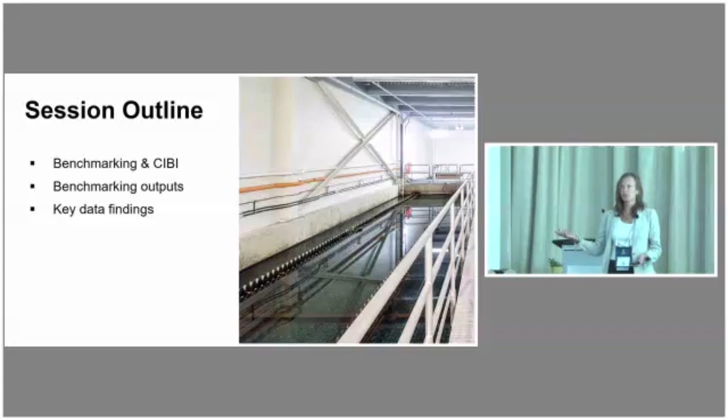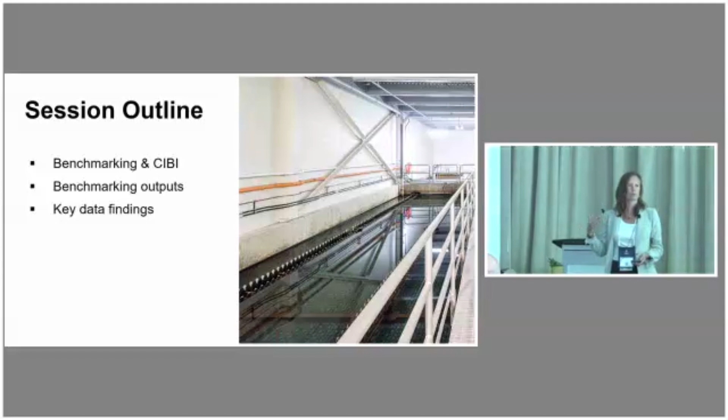I'm just going to do a brief introduction talking about benchmarking. What is benchmarking? What is the Canadian Infrastructure Benchmarking Initiative? But then I won't go too long. I'll get into the good stuff, the data, looking at trends. What have we found from benchmarking? What lessons can operators, water and wastewater operators, learn? Any questions along the way, please just ask.

So the idea behind benchmarking is, we're not back in high school, it's not about grading, it's not A's, B's, and C's and determining who's the top of the class. It's about comparing performance outputs with yourself over time or with other municipalities.

Oh, okay. Yeah, okay.

So the idea is not to compare about who's better or who's worse, but to say, okay, how am I doing? How do I compare with other municipalities? Am I doing more? Am I doing less? And ultimately, the idea is that everyone can improve. So when you can compare yourself against other utilities, you can figure out, oh, maybe I'm doing too much maintenance, maybe I'm not doing enough, maybe I don't have enough staffing. And then you can improve your own processes. Ultimately, of course, the question you get is, are you providing value for money? And that's what you need to be able to answer.

A little bit of background on this benchmarking project: it used to be called the NWWBI, or National Water and Wastewater Benchmarking Initiative. We had to change the name because we brought on stormwater, and then we brought on roads and solid waste. So it became the Canadian Infrastructure Benchmarking Initiative.

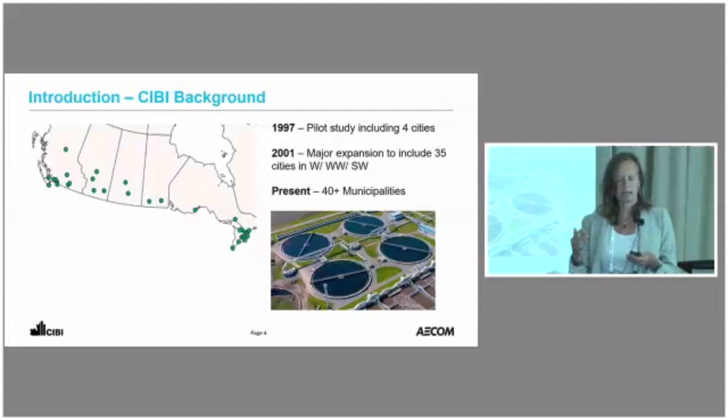And then in 2001, there was a big expansion. Now the project has over 40 municipalities and regional districts that look at and compare how they perform in the management of Canadian infrastructure.

As I brought up, we've got 7 service areas. I know the folks in this room aren't necessarily interested in all of them, but there's water treatment, water distribution, wastewater treatment, wastewater collection — that's probably what this group is interested in. There's also solid waste, stormwater, and roads.

So why benchmark? It is a bit of work, so why bother? The idea is about levels of service — how do we know what level of service we're providing, what level of service we should provide, what can we provide? It's about identifying what you're providing compared to other municipalities and being able to communicate that to staff, management, council, boards, and the public, and to actually measure it. A lot of utility operators have a sense of what's happening, but it's nice to put some numbers behind it, which allows you to articulate and build a business case to prove what you already have an inkling of.

If you've got the numbers to support it, you can take that to council, to the board, to the public, and it helps you as you endeavor to improve your operations.

Another big thing is it provides network peer-to-peer sharing. So it's like, hey, you contracted out your CCTVing? Yeah, I did. Is it working better for you? No, we brought it back in house. Things like that, and you can have a lot of those discussions amongst the group.

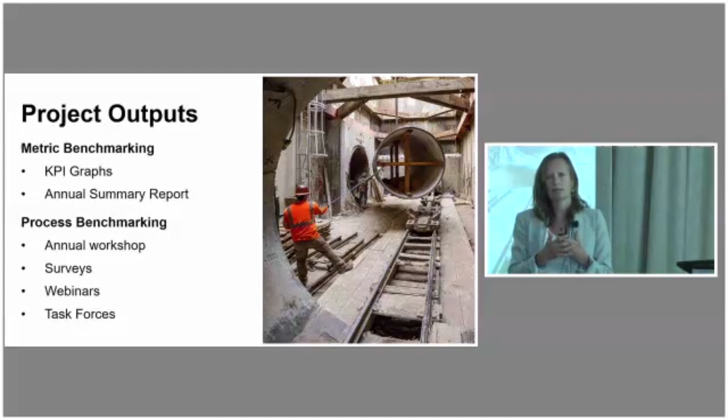And another thing we do that's quite handy is surveys. A lot of the time municipalities will have a question, like, how do your field staff record data in the field? Do you have laptops? Is it mandatory, or do you still allow for pen to paper? And if you do, what tablets do you use, what software do you use, that kind of thing. We'll send out a survey and get about a dozen responses within a week of what other municipalities use. So, brief.

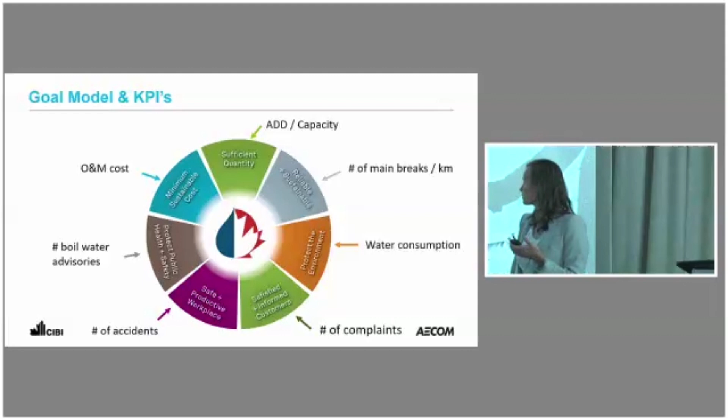Now, people ask, well, how can you compare? You've got Halifax, you've got Victoria, you've got Saskatoon. The idea is that everyone is trying to achieve the same goals, no matter where you are. You want sufficient quantity, whether bringing the water in or sending the sewage out. You want it reliable and sustainable, so you want to minimize disruptions and emergency repairs. You want to protect the environment, satisfied and informed customers, a safe and productive workplace, and to protect the public's health and safety. But you want to do all of that at minimum cost.

And so we decided everyone's trying to achieve those goals, so we developed KPIs under each of those goals. That's what the key performance indicators are that we measure and compare amongst the group.

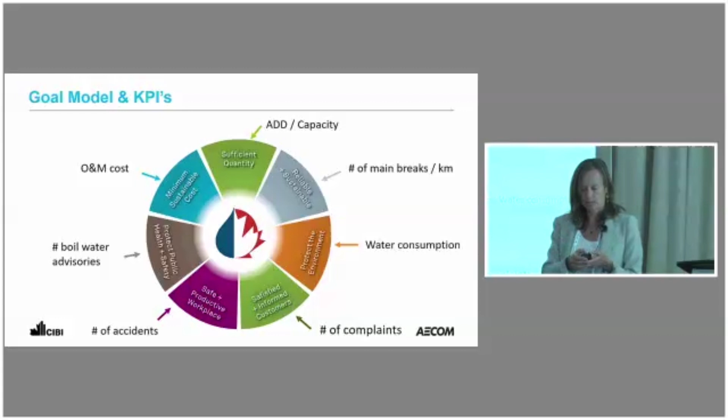Okay, so now we get to the good stuff, which you guys might be more interested in seeing. I just pulled up a few highlights of some of our data. We produce these graphs in Power BI, and you'll see each bar represents a utility, a municipality, or a region. I don't have the names listed here. One of the things within the project is we have an agreement of confidentiality. The reason being, people are very open and honest, and they pull all the skeletons out of their closet and show themselves warts and all, with the idea that this isn't all going public.

So whenever I present this information out in the world, I just take off the municipalities, but these are individual municipalities. So we have main KPIs, which are the bars, and we sometimes use a related KPI on the right side here, shown as a dot, because we like to compare and see if there's a relationship.

So what this graph shows is the number of main breaks, how many main breaks you get per 100 kilometers of system. We always normalize it by something so you can compare one municipality to another. Then we look at the average age of your water mains, which is the related KPI shown as the dot. You can see it's not a 1-to-1 ratio, but there is a general trend, not surprisingly, that systems with older pipes generally have more water main breaks.

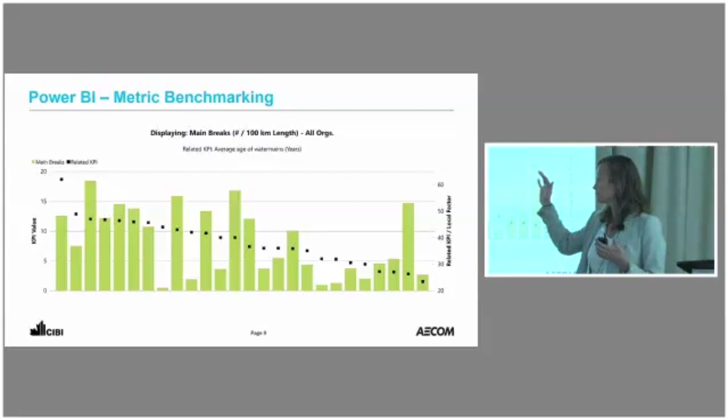The other thing to note is the average age. You get a municipality out here with an average age of their water mains of 60 years. Not a surprise, that's average, so they're going to be getting some water main breaks. But then you've got some younger, newer municipalities where their average pipe age is closer to 20. So there's quite a range across the country. Some of these are BC, but this does represent municipalities across the country, which is really interesting to see.

Any questions? If you guys don't understand, I see these all the time.

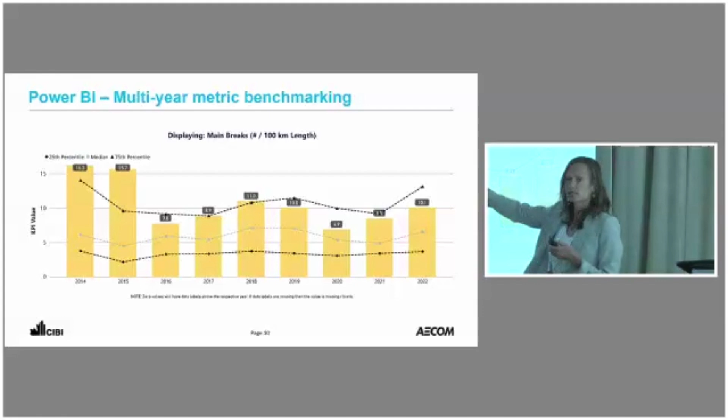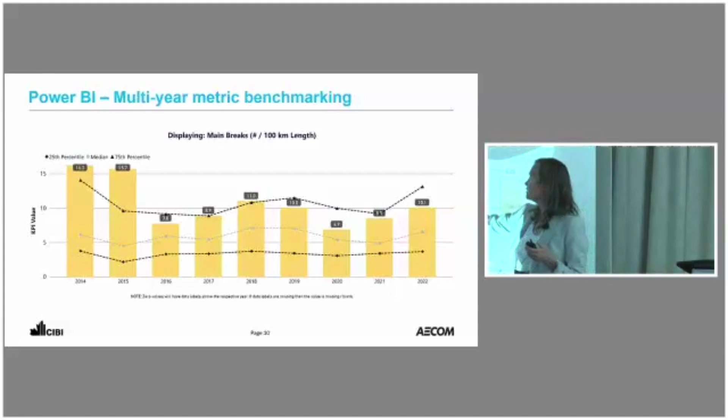So they had quite a lot of main breaks over here. It dropped quite a bit, maybe they got rid of their AC mains. Then you can see it starting to climb up a bit, maybe that led to some renewal of some of their system, and then it starts to decline, and then peaks up again. Certainly around COVID, some of the activities, a lot of their maintenance and renewal, didn't get done, so there was a bit of a lag. This is very common for a municipality to see a trend of main breaks over time, waxing and waning depending on what's been happening.

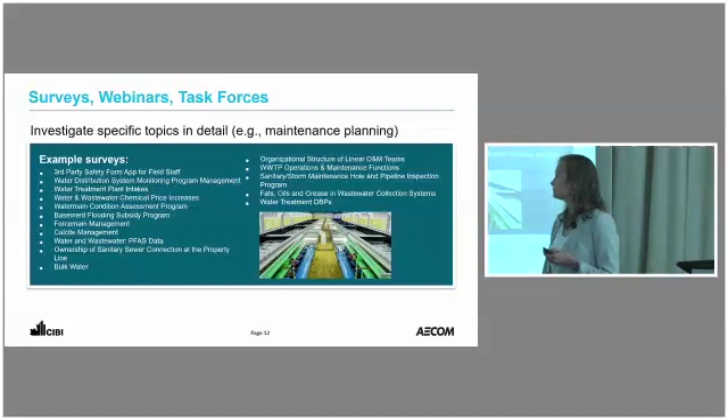We do send out surveys, as I mentioned. Here are some examples of surveys we send out, whether it's water distribution system monitoring, organizational structure of your O&M teams, maintenance hole and pipeline inspection programs, fats, oils, and grease, things like that. Anyways, some of the topics that seem to be really hot topics right now.

Big one is chemical prices. We have a task force looking at increases in chemical prices, and AMI is another big one.

Again, as I mentioned, there's a confidentiality agreement, so that's why everything will be anonymized. It's an annual process, so we collect data every year, and it's up to the municipality whether they want to participate and which modules each year. You try it one year, you don't like it, you don't do it the next year, or you like it, you keep it on and do it again next year. So it's sort of an annual process.

Okay, I'm going to show you some more data. This is an interesting one. This looks at how quickly you're responding to emergencies after working hours, and a lot of municipalities struggle with this. How do they organize their shift work? Do you have people on call? Do you actually have the works yards manned, for how many hours, just 8 hours, or do you have two shifts? There are two interesting things you can see here.

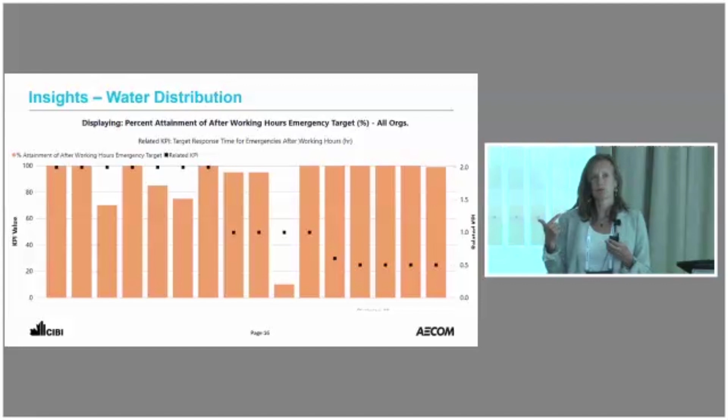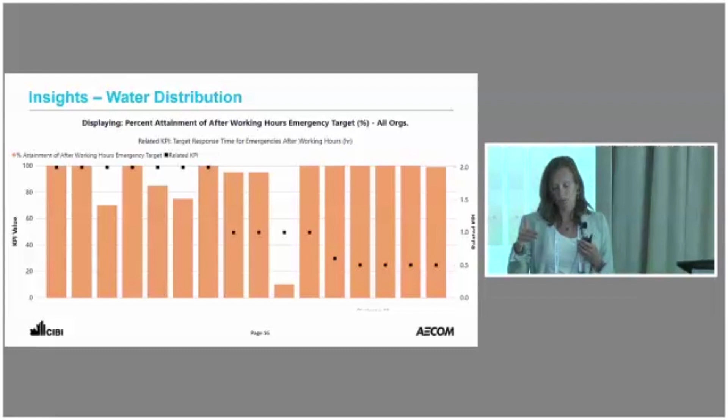One is, what is your target response time for emergencies after working hours? This is for the water distribution system. You can see it ranges - a lot of municipalities target 2 hours, wanting to be able to be on site assessing the situation within 2 hours. Some municipalities target 1 hour, and others say 30 minutes - even after working hours, they want to be on site within 30 minutes assessing the situation.

Whether municipalities achieve that or not, well, you can see with the bar. Most of them achieve it 100% of the time, but not always.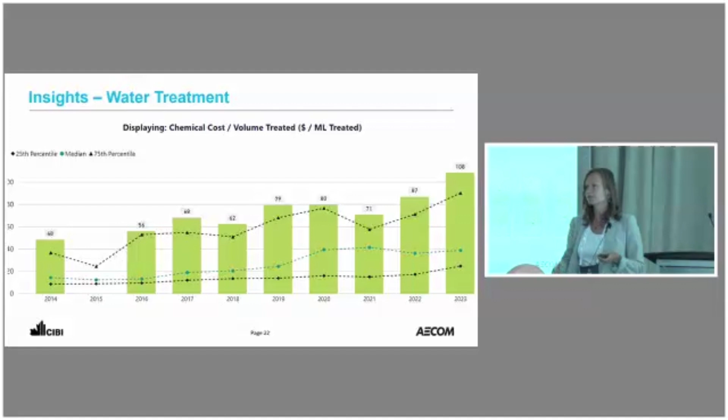So this will be total cost for the whole year. You're right, it changes by time of year how much chemicals you need to use. Is this what everyone's seeing, or are some people achieving better results? Is everyone experiencing higher chemical costs? Yeah, yeah.

Okay, now a bit on wastewater collection. So this is kind of an interesting graph. I geek out on the data here, but I like what this one shows me, because this is the annual O&M cost for the system, and it shows it by replacement value.

As your system becomes more valuable because the cost of pipe goes up and your system extends, you build out another subdivision, the cost of your system goes up, but your O&M budget basically either stays the same or goes down. So your budget for the value of your system, in real dollars, is actually going down. Even if you had the same O&M budget for the last 10 years, in real dollars that's actually a decreasing budget, because what you could get for $100,000 today is a lot less than what you could have gotten for $100,000 ten years ago.

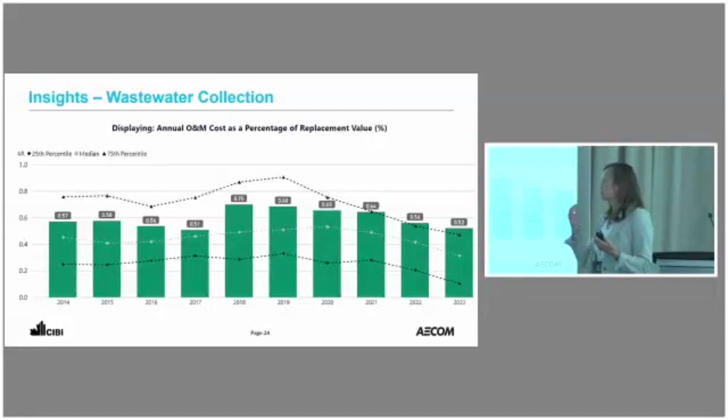I think this is really interesting, and it's tough. O&M budgets are the first thing to be cut, or really hard to get increased, even if your system is expanding, even if the cost of pipes is going up, even if trucking costs are going up.

This is also what I talked about. You can use this data to help build a business case. You can take it and say, this is why I'm hurting, this is why I'm doing this. I can't do more with less. I do less with less.

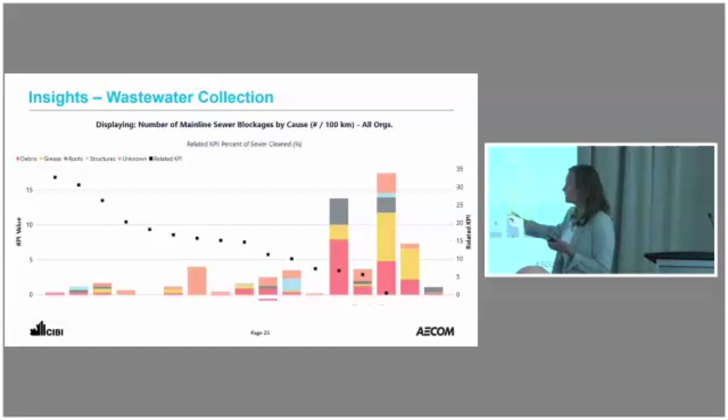This one is looking at sewer blockages, and also the different causes: how much of your sewer blockages are from debris, grease, roots, structures, or unknown. My related KPI is percent of sewer cleaned. Not a shocker, but it's nice to see the data support it: the municipalities that are cleaning more are having fewer blockages. I know I'm pointing out the obvious, but it's sometimes nice when the data supports it.

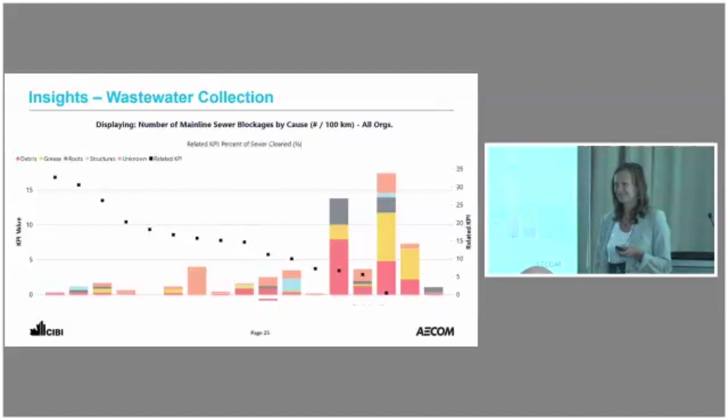Now we're looking at wastewater treatment. Any wastewater treatment folks in here? Okay, good. So some new things are happening, and we're having to keep changing our KPIs as life goes on. For instance, we just added KPIs on PFAS. We didn't have that years ago.

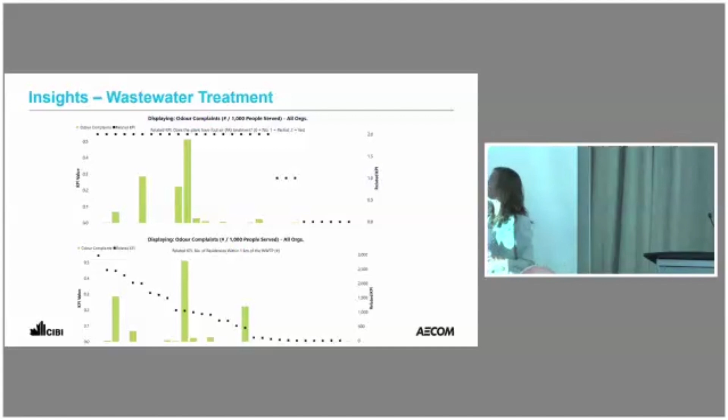This is another one that I thought was interesting. Does anyone else have odor complaints? Okay, so either you can build a system like you guys built, or look at things like foul air treatment. The bars are the number of odor complaints you're getting, and the dots show whether you have foul air treatment: yes up here, partial in the middle, and no down here. So clearly municipalities that have odor complaints are putting in foul air treatments, but they're still getting complaints.

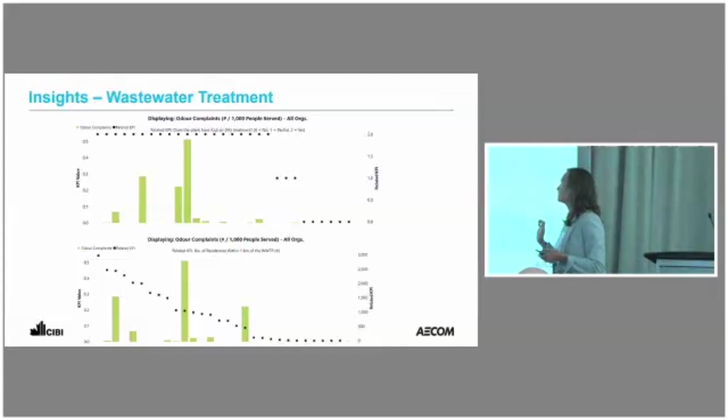So then I thought, well, does it just have to do with the number of residents nearby? Again, yes, I think there is some correlation. The bars show the number of complaints, but the dots show the number of residents within a 1 kilometer radius.

Or you just build an internal plant like CRD.

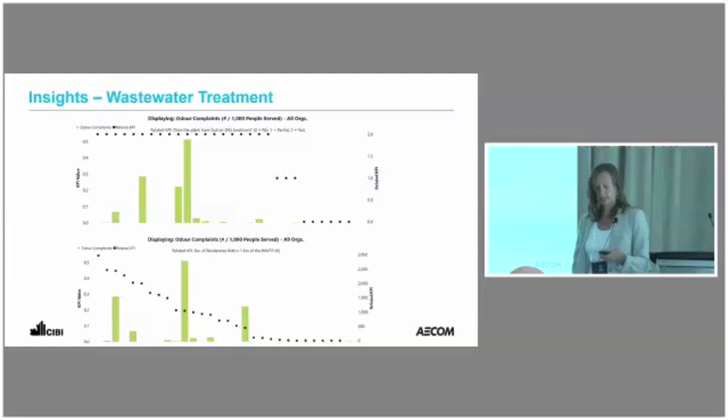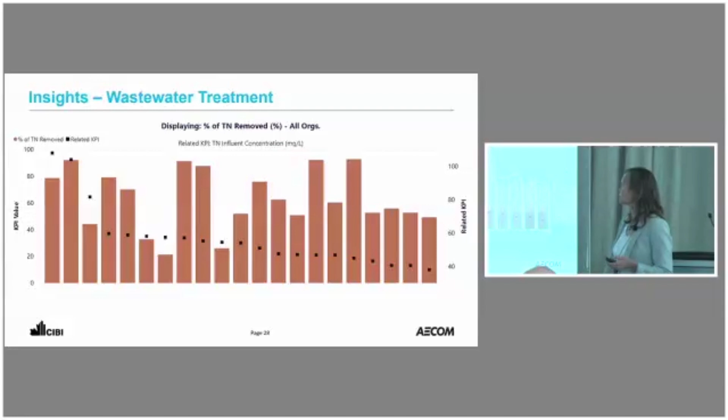This one, again, I'm just showing a few highlights I thought might be of interest: percent of nitrogen removed. I pulled out the dot showing the influent concentration and how much nitrogen you're actually removing, or the percent of it. A lot of nitrogen is getting removed out there, but you can see there's a huge range in the effectiveness of removing nitrogen.

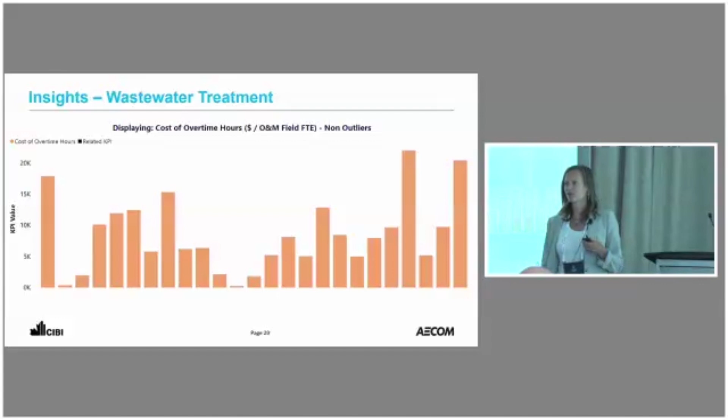And it ranges, right? There are some plants that hardly have any overtime, and some plants that have tons of overtime. Again, this isn't about who's worse or better, but if you're a plant over here, you might think, that's interesting, why are we spending so much on overtime? And then you can start digging.

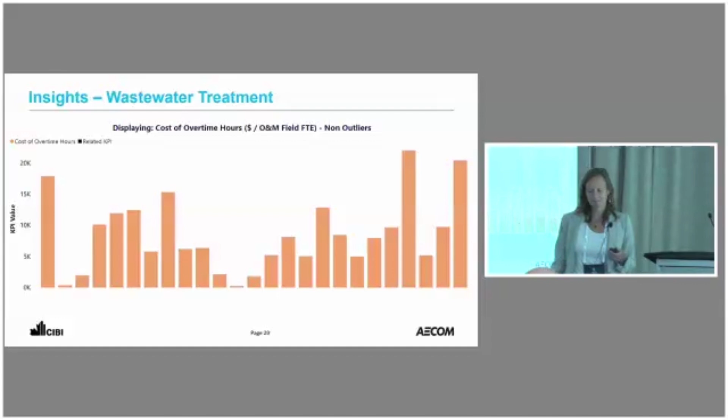Okay, another one, I'm killing you with data here with graphs. This is an interesting one we do for all our modules. The idea is that you might pay someone for 40 hours a week, but they're not actually working 40 hours a week every week, because people take vacations, get sick, and have training. So how much of the time someone's actually being paid are they able to work? The important part is it comes around your O&M planning, because you can't plan a 40-hour week for 52 weeks as a full O&M plan, since people are actually only working about 80% of the time. So you've got to think, okay, I need to average 32 hours a week or whatever it is for your plant's actual staff time doing O&M.

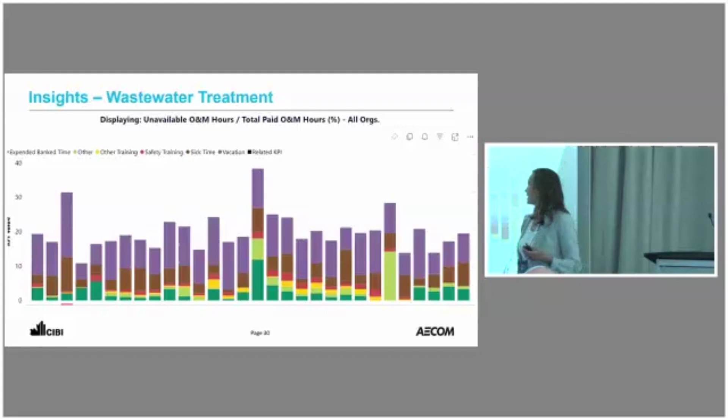And you can see there's a big range. The purple is vacation. Everyone takes vacation, but if people are allowed to bank vacation, then maybe all of a sudden you get a peak year, or you have older staff with higher amounts of vacation. You've got to plan for that. Or you're a municipality that lets you bank time and then they take it, right? And all of a sudden we're done with COVID and everyone's like, great, I can travel around, I'm spending all my bank time, see you later. Now you only have staff working 60% of the time at your plant.

So those are some of the things we're seeing post-COVID. Anyways, just some observations.

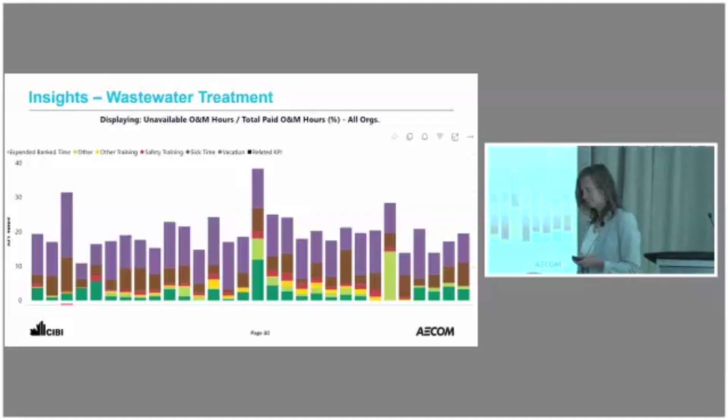Another one, wow, I'm doing a lot of wastewater treatment. Another one is looking at reactive hours. So how much of the time when you're maintaining your plant is preventative maintenance versus reactive maintenance? Those are disruptive because you're working on something and then, oh shoot, this is broken down, alarm's gone off, whatever, off you go and do that. You can see that some municipalities, or some plants, up to 40% is reactive. So they're spending almost half their day just going from alarm to alarm.

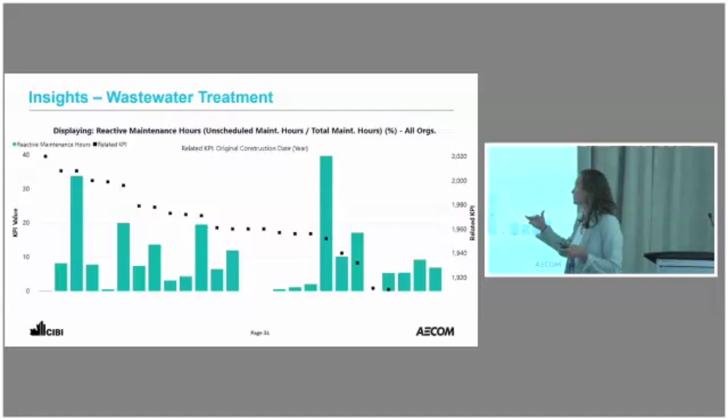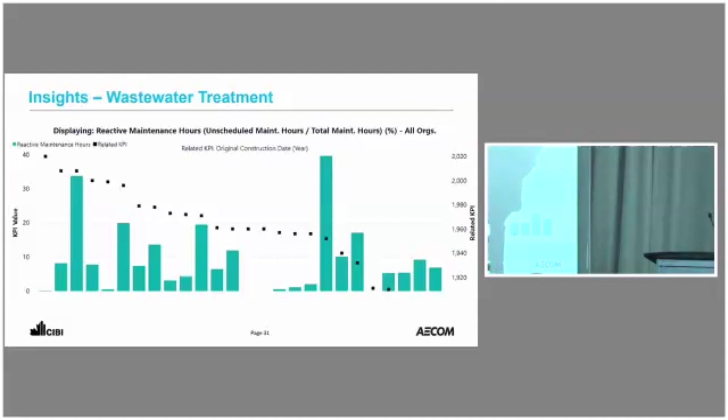The other thing I thought I'd bring up to see if there's a relationship is: when was your plant built, and does that make a difference? Are the newer plants over here doing less reactive maintenance? It's interesting to see that there's a plant here built in 2015, but they're doing tons of reactive maintenance. So you go and think, what's that about? But then there's some plants down here built in the 1960s with barely any reactive maintenance.

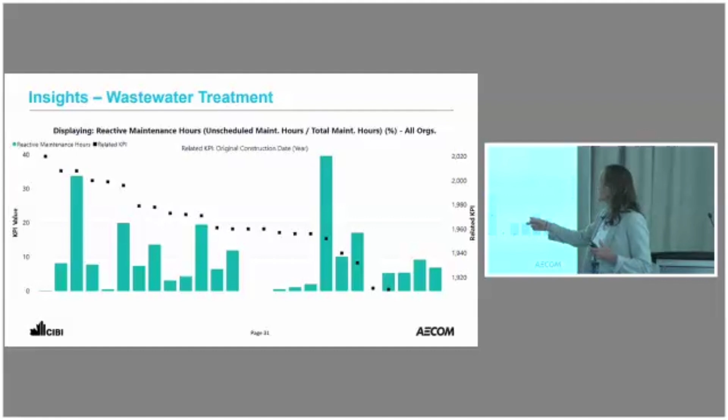Or maybe they just don't have SCADA and don't know when things go wrong. I don't know, but yeah, it can really be an eye-opener for plant operators.

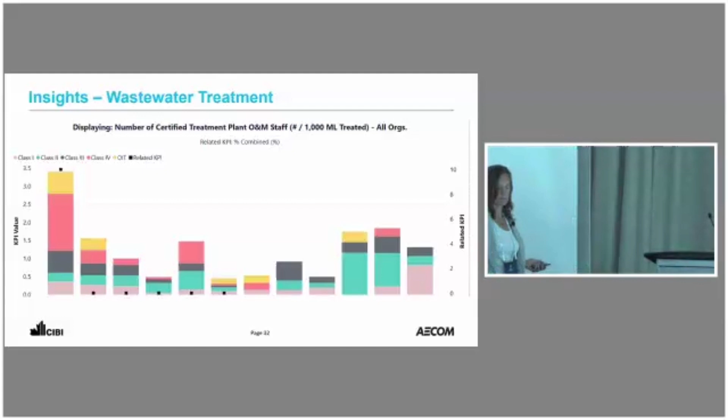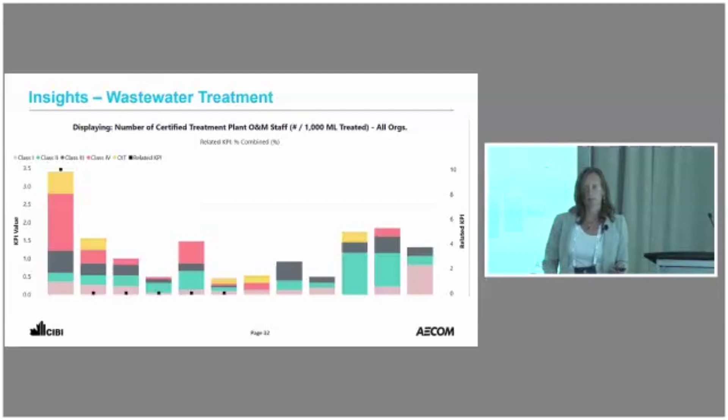I also put in the percent combined just to show you. So this plant is about 10% combined. We won't want to point fingers, but you could probably guess who that is.

So what I wanted to do there was just to show you a brief outline of some of the trends we're seeing in benchmarking in the world of water, wastewater, distribution, collection, and treatment. With brief highlights, there's hundreds of KPIs out there. I don't know if any of that was interesting for you, but any questions on some of the data I presented, or on benchmarking as a whole, the initiative? No?

CRD participates in it. I don't know if you want to share some of the things you've learned from it. Well, we're newer - the wastewater plant is new to the CRD. The CRD has been participating for a long time, but wastewater is just jumping in now with both feet.

There's a lot of questions, a lot of administrative stuff. You need to have a lot of data points. Luckily, we have SAP - we've got preventative maintenance programs and all those kinds of things in place that we can draw on. But you kind of need to have some of those things before you commit, because you're not going to be able to input any data points if you don't collect any data points. So a bit of it is just the whole setup, and then going, okay, we want to participate in this, and jumping in.